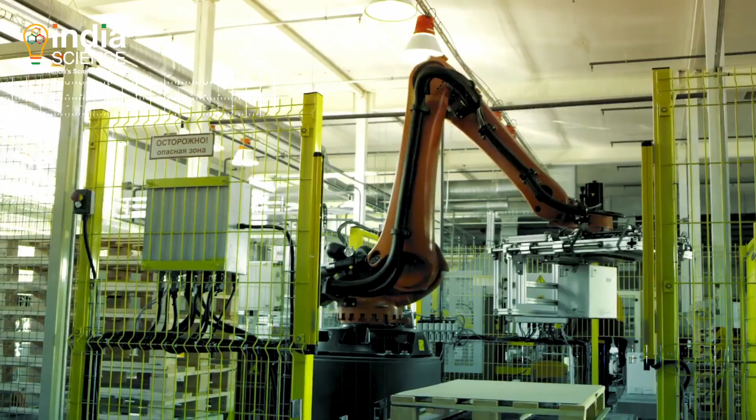With advances in technology, robotic automation is transforming the way we live and work, our efficiency and our safety levels. It is set to become the driving technology underpinning a whole new generation of autonomous devices that could provide the missing link between the digital and the physical world.

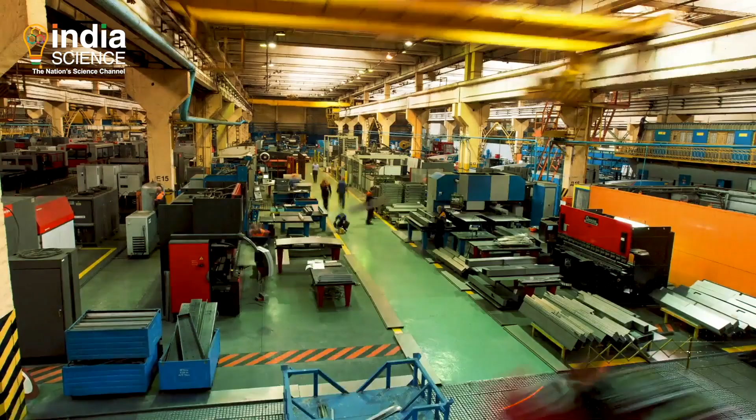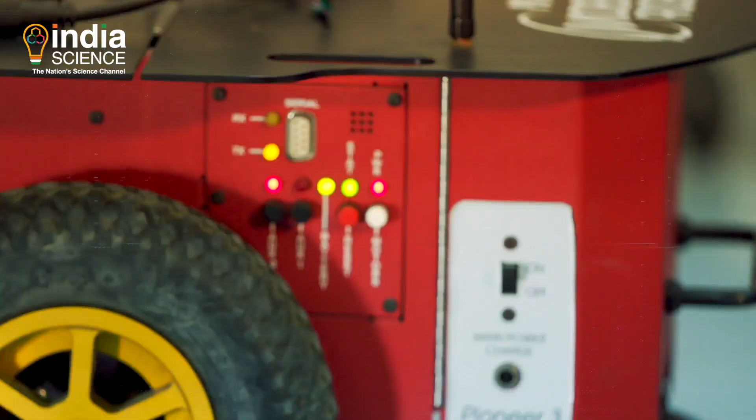How is India going to make this transition? How do we stay globally competitive and switch to smart manufacturing? What new science and innovation will power growth in this sector? Do we have the technology and know-how to be self-sufficient in this arena?

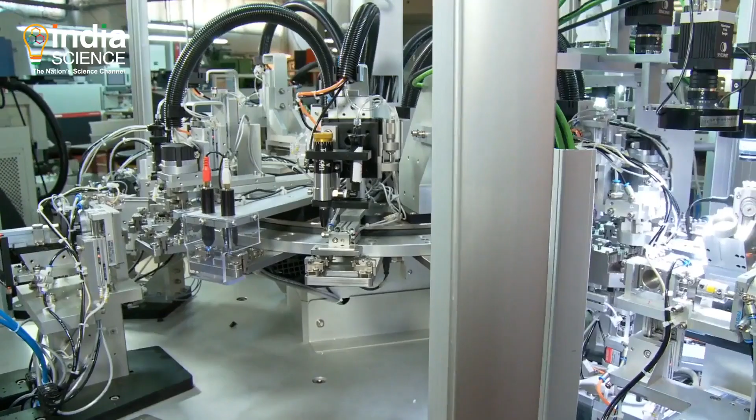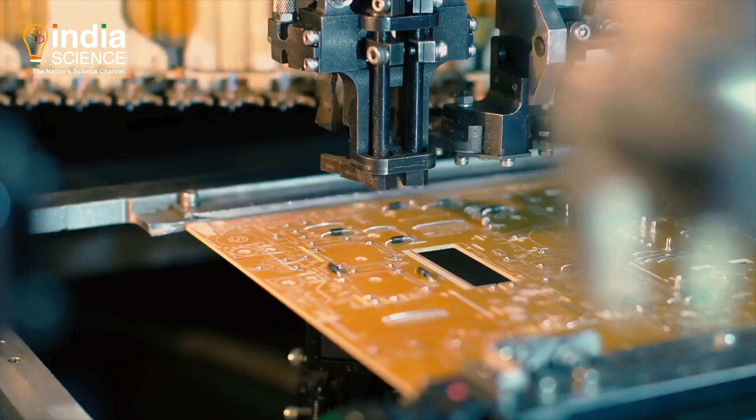Robotics is already a driver of competitiveness and flexibility in large-scale manufacturing industries. It improves worker prosperity by decreasing the time spent on exhausting, repetitive undertakings. Secondly, it improves the nature of work done as mechanical robotization infers a decrease in human error.

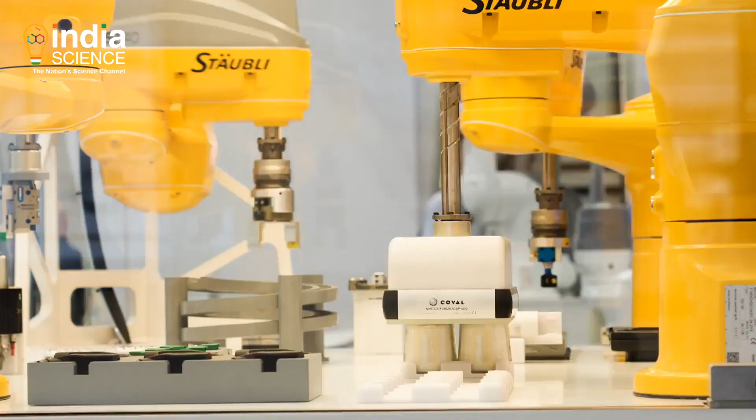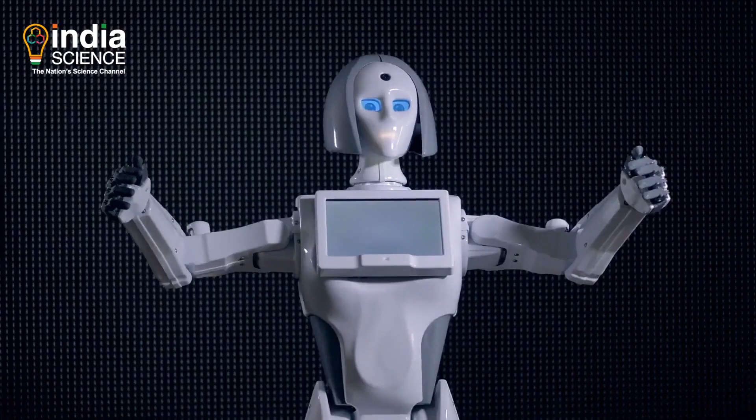The number of robots in use worldwide has multiplied threefold over the past two decades to 2.25 million, according to a June 2019 report by Oxford Economics. Trends suggest the global stock of robots will multiply even faster in the next 20 years, reaching as many as 20 million by 2030.

Robots are quickly moving out of controlled environments into homes and public spaces. In fact, researchers are also developing artificial intelligence systems that will allow robots to make decisions autonomously.

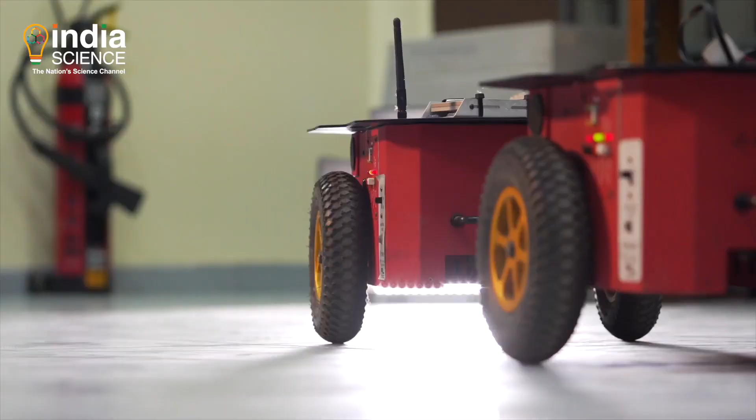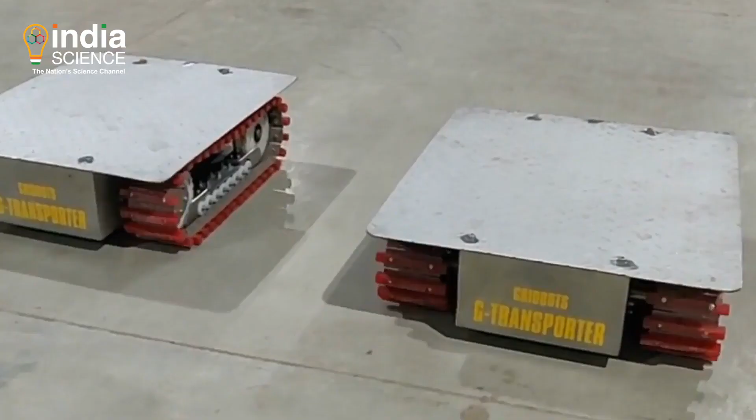Despite the fact that India has just 3 robots for each 10,000 workers, the homegrown robotics industry is developing at a remarkable rate. After the start of Make in India 2.0, many companies have come forward with their innovative ideas for robotics.

One such company is Gridbots. Gridbots is an Ahmedabad-based company that was established in 2007. The company works in the field of robotics, specifically artificial intelligence and machine vision.

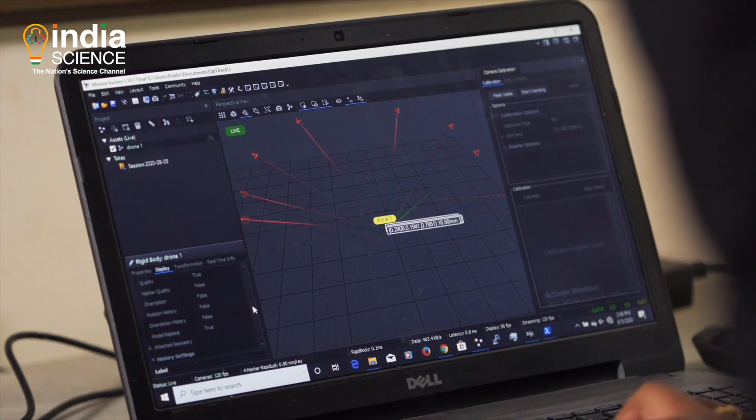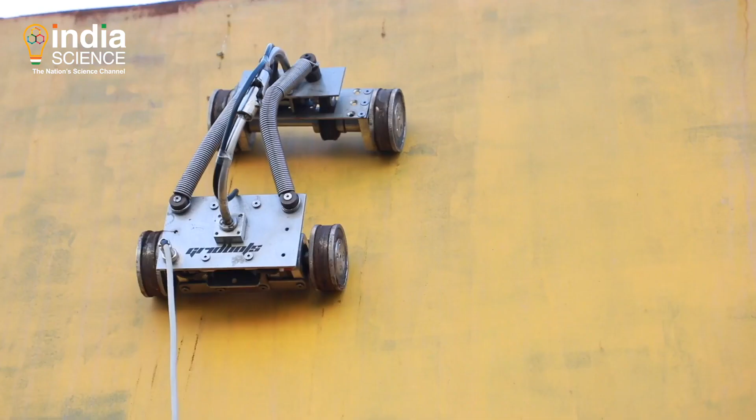The company develops robots that can be used in the industry for a variety of applications like dimension measurement, sorting and grading. Such robots are also used in outdoor work, such as surveillance in different kinds of terrain. They are capable of planning and navigating autonomously because of an inbuilt engine called the Grid Eye.

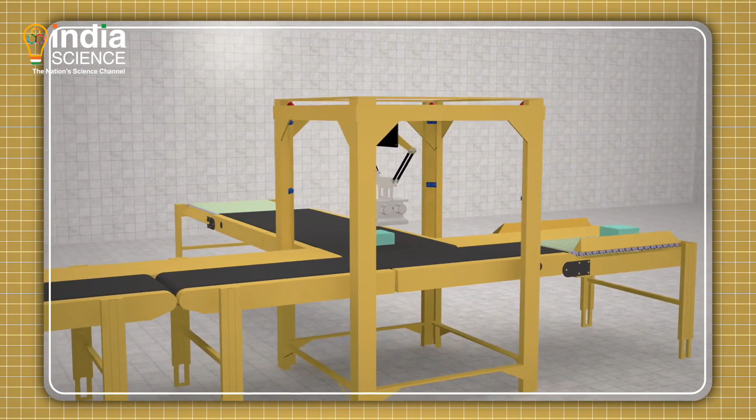Let's see what a Grid Eye engine is. The robot is able to process inputs from a range of sensors and cameras and can then plan out effective responses and actions, which include managing safety standards.

Grid Eye engine is the outcome of 15 years of research in the field of robotics, machine vision, and artificial intelligence. We have been using multiple sensor feeds like 2D cameras, 3D cameras, LIDARs, monocular cameras, stereo cameras, and trying to build an algorithm which can help a machine perceive its environment the way a human being does.

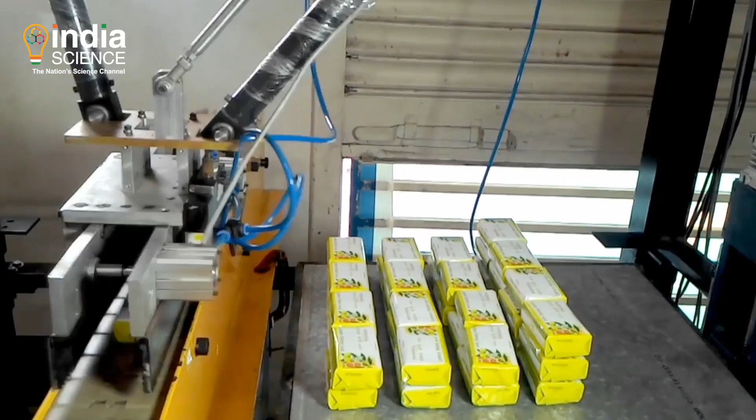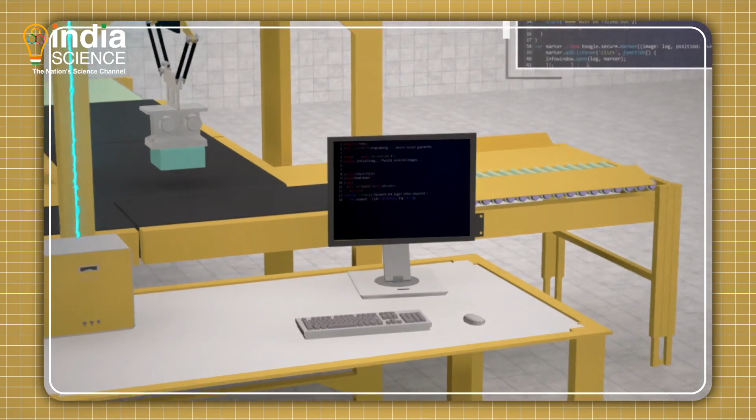How exactly does this work? There is an algorithm that helps the robotic device assess the environment and collate data from it. The data is then sent to the processing engine, which filters out the required data and processes it at a very high speed. Based on the data, the robot undertakes the task. The processor has a high level of accuracy that helps these robots to work efficiently and safely.

First of all, you have to identify multiple objects which are present in the video and then segment them, exactly how they are positioned in a 3D coordinate system, and then take actions. This has to be done in a fraction of a second, which becomes very challenging for today's hardware without a very good algorithm or software running on its core.

With Grid Eye, we have been able to solve this problem. Today, most of our robots are being powered with the Grid Eye engine, which helps our robot to work in the industry the way a human being or a human laborer works.

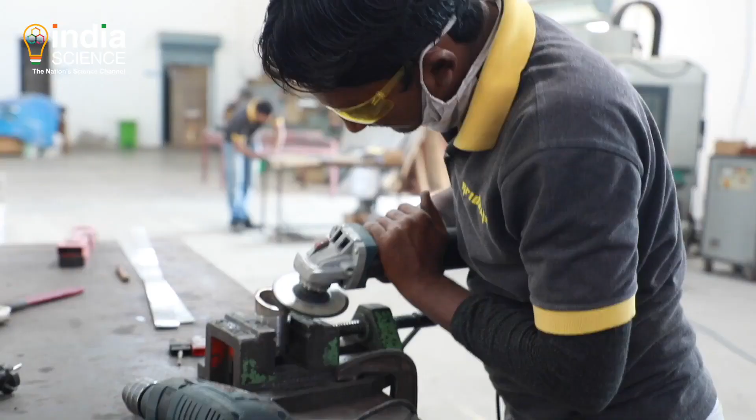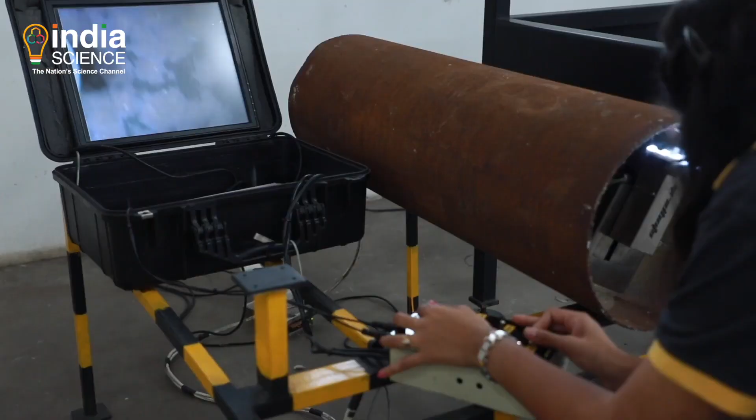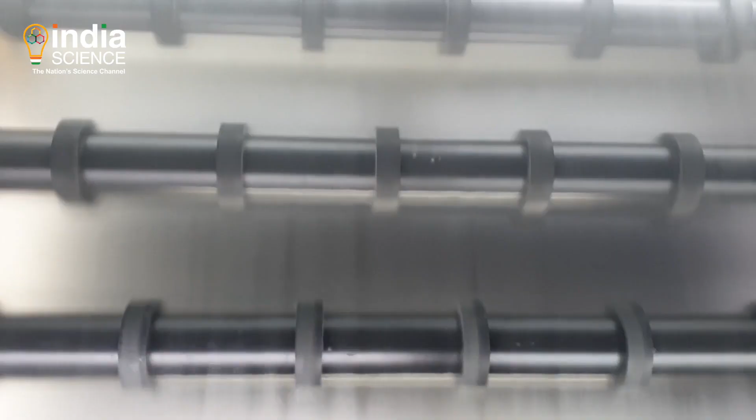The team at Gridbots creates robots, designing them to suit a customer's specific requirements. With indigenous research and manufacturing capabilities, Gridbots has deployed robots for almost all segments of industry and is targeting international markets. Some of the sectors where our robots are operational are glass, solar glass industry, manufacturing industry, food industry, pharma industry, electronics manufacturing industry, and warehousing.

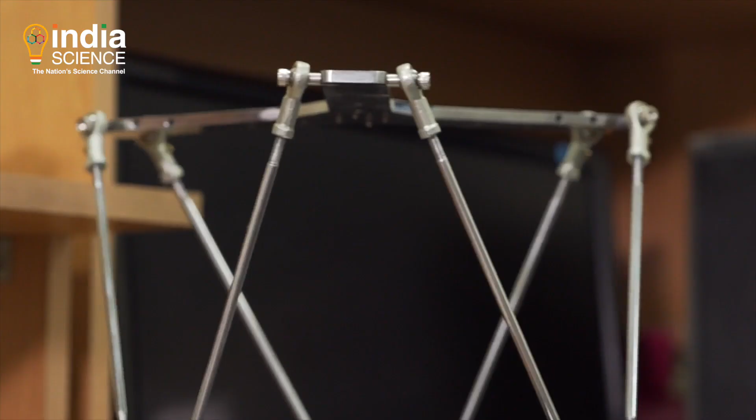What defines the company is their research and development. About 80% of their revenue goes to R&D. The robots made by Gridbots are economical, costing a fifth of those available in the market.

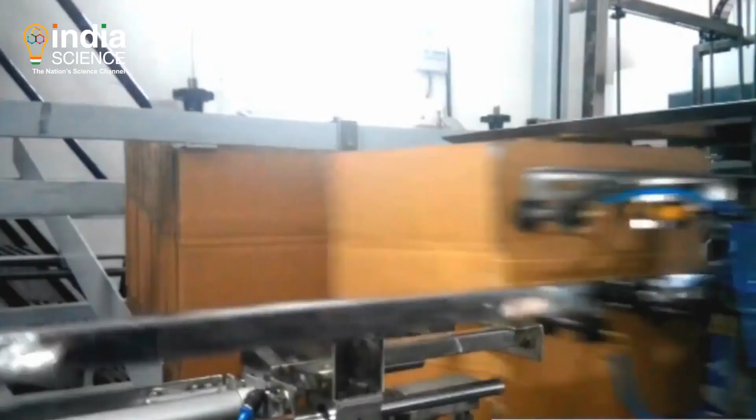You need to have an edge over your competitor. That edge can only come with dedicated in-house research, which has to be there with every industry. These industries should be investing a lot in research and ensuring that their products, services, or technologies are way ahead of their closest competitors. That is the only way to survive and grow with this vision of Atmanirbhar Bharat.

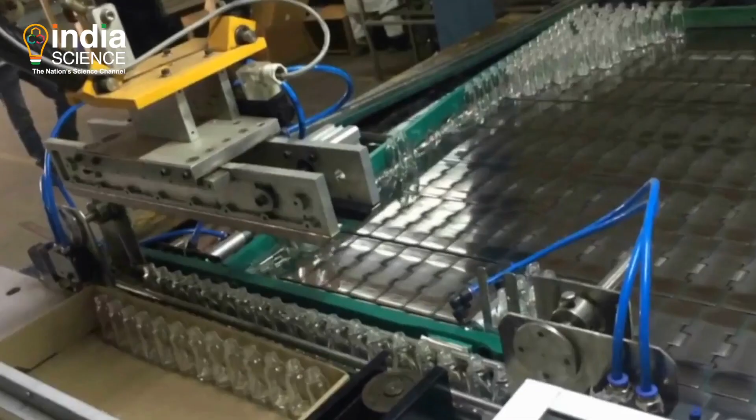Gridbots helps a lot of different industries by providing robotic solutions and machine vision that increases efficiency, working speed, and helps clients reach goals in a time-bound manner.

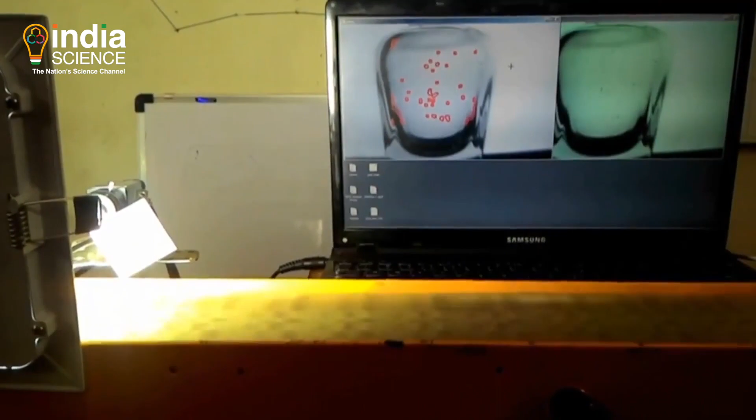The Gridbots engineers also visited our factory and warehouse, and they came up with a solution. They elaborated that they have a system capable of automatically transferring material, and that robotic arm is also capable of picking material from the ground and at some height.

Around 90% of their work is for the government. Their customers include the Ministry of Home Affairs, the Indian Navy, ONGC, ISRO, IIT Gandhinagar, etc.

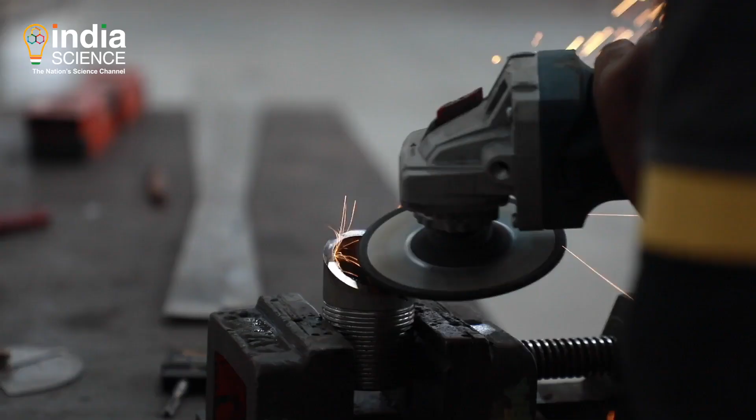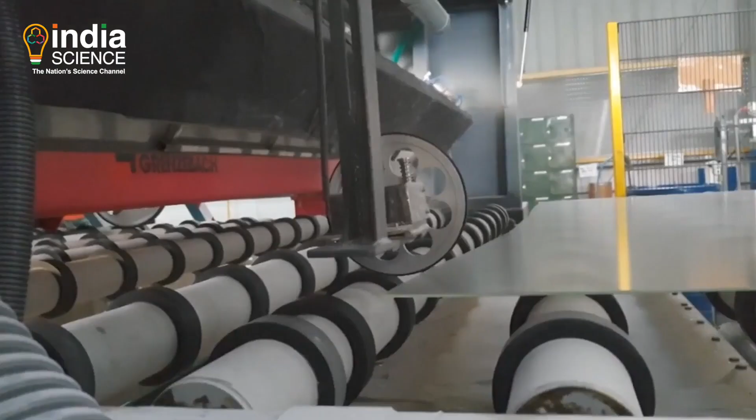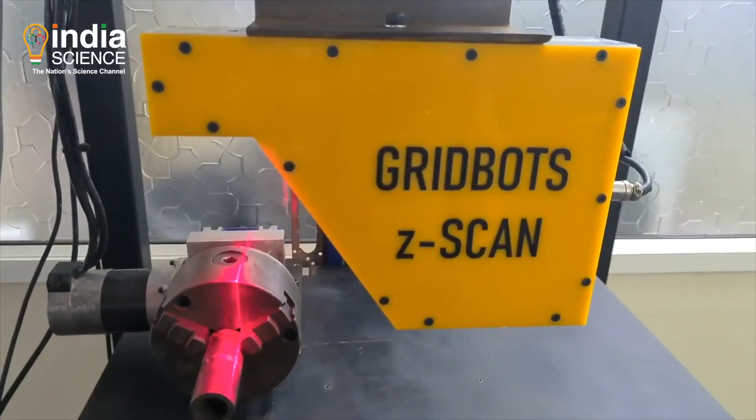Apart from making robots for different applications, Gridbots also works on machine vision systems, in which they make various products under different categories. A range of inspection systems including glass inspection, welding inspection, fabric inspection, and 360-degree tube inspection solutions are made. Geometric MegaView, MicroView, and Z-Scan solutions are developed under Dimension Measurement Solutions. A range of vision systems are developed to cater to different applications in various industries.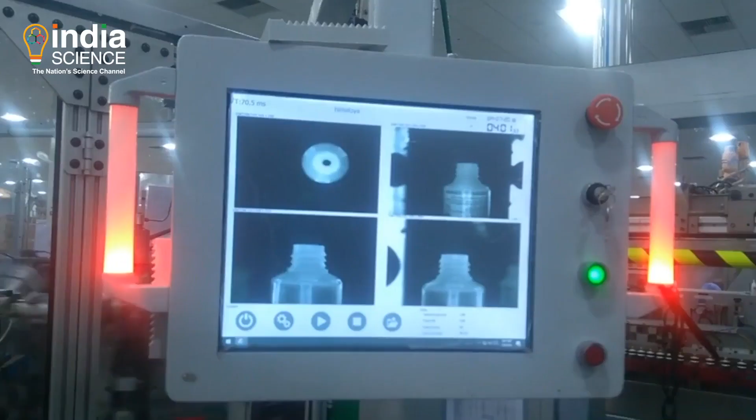Over the years, many such products have been developed that have been sold within the country and even outside the nation. When we say Atmanirbhar Bharat, we are talking about competing in global markets, where we know there are big players already established. What we are talking about is volume first, and quality of the product second.

When you're talking about quality of the products, it is necessary that we switch from the traditional way of working and adapt to something that takes care of quality and volume autonomously. Automation is the way to go.

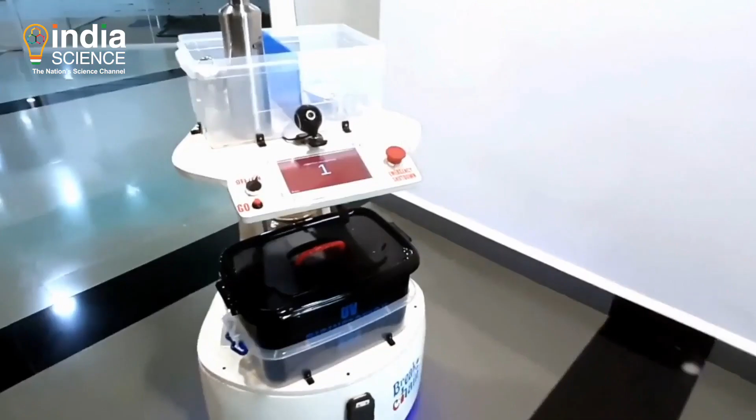India Science Channel was launched in 2019 by the Department of Science and Technology, Government of India. This internet-based dedicated science web channel is implemented and managed by Vigyan Prasar, committed towards science communication. The channel features science documentaries, discussions on current topics, interviews, and different programs covering the entire landscape of science and technology to make science popular among the masses.

India Science is a flagship project of Vigyan Prasar. Over a year and a half, we have produced more than 1,200 videos of different sizes, lengths, and genres, for different domains for the people of the country.

We've spoken, we've dived deep into the realms of different domains of science and technology, and we have gathered news, stories, films, and videos in almost every format imaginable.

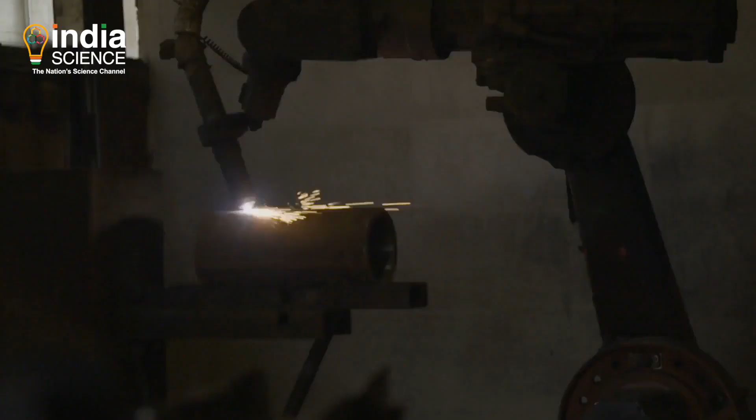We have seen how robots can be used in various industries. Today, there are also a host of service robots engineered to automate menial, time-consuming or repetitive tasks, releasing human workers to accomplish more intellectual functions. These can be used anywhere from hospitals to hospitality.

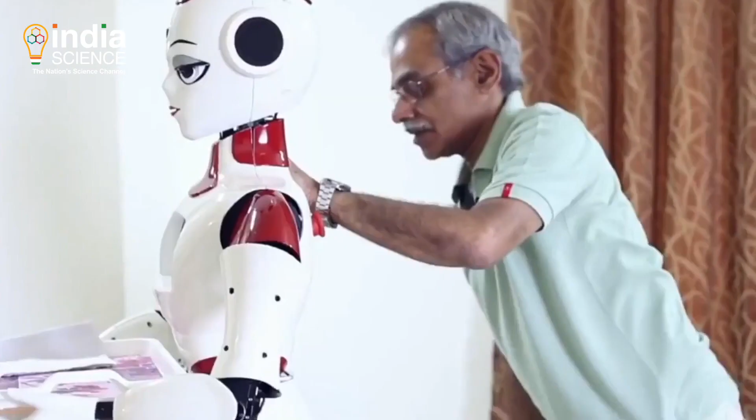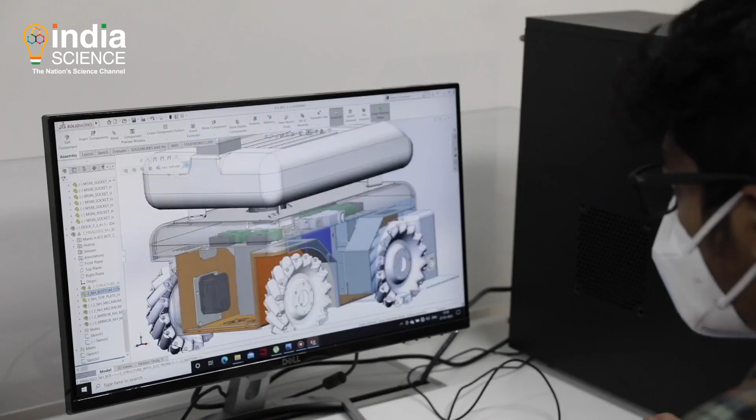Asimov Robotics, a Kochi-based company, has been manufacturing various robots since 2012. Their vision is to use technological and software innovation to make certain sectors safer and more efficient by increasing the quality of service. They have created robots that can assist humans by taking care of day-to-day jobs in sectors like healthcare, retail, hospitality and security. Most of the robots developed by the team at Asimov are created to work alongside humans - they can coexist and cooperate.

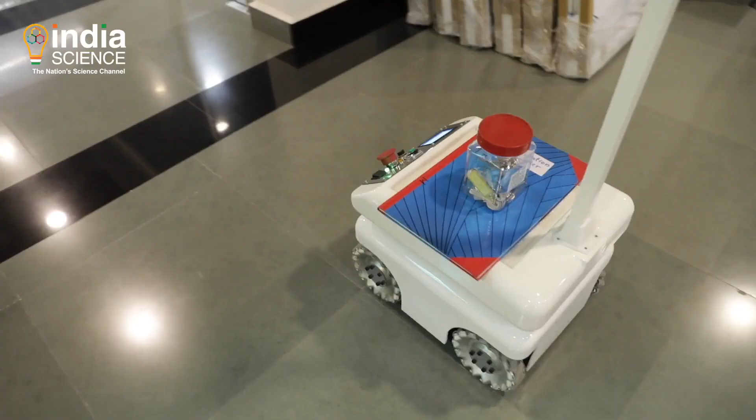They also have to coexist with each other in the case of cobots. The science behind this technology is primarily, if you look at the mechanics and hardware of the robot, kinematics and dynamics. The structure talks about how much freedom a robot requires to do a job. So we design a robot according to the task and the requirement of dexterity for that task.

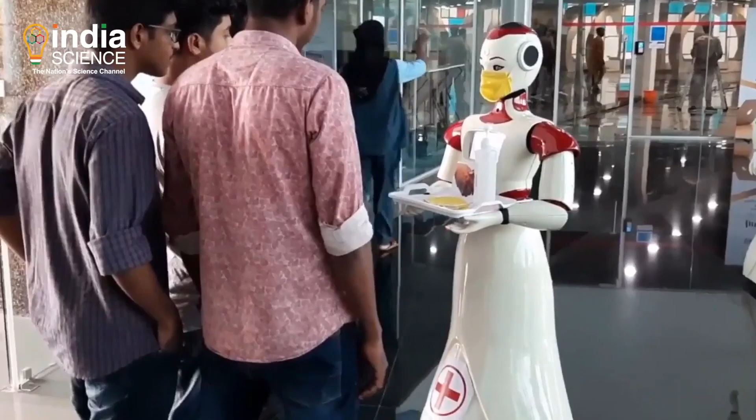See them operational in the front office, greeting customers, printing visiting passes for customers, and answering FAQs. ESAF Bank introduced this robot two years back, focusing on customer service for those coming to the lobbies who may have different questions and doubts, which they can answer through this robotic process.

That also helps my staff serve customers better. For certain customers, the robot helps direct them to which counter they should go to, so customers get the joy of better service through the robotic process.

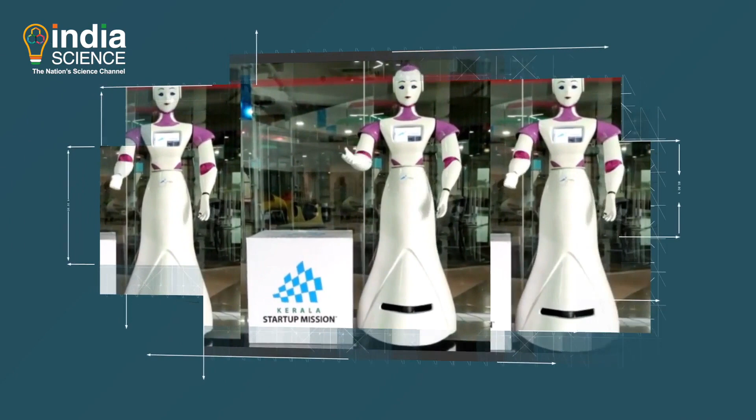These robots also have the capability of ensuring COVID-19 protocols, like taking body temperature, checking for face masks, dispensing hand sanitizer, and using sensors to ensure social distancing inside the bank premises.

The hardware of these robots is created using kinematics, which is the study of all the possible motions of a robot. Each robot has multiple sensors like radars, proximity sensors, 3D point cloud cameras, and GPS, all fused so that the robot is able to compute its trajectory.

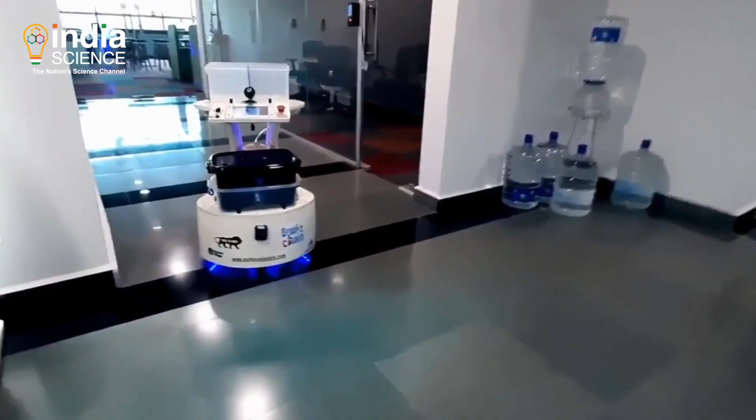For example, in the case of a logistics robot, autonomous navigation is used to control movement from point A to point B, understand the floor plan, and avoid dynamic obstacles in warehouses.

When it comes to manipulation, kinematics is used to compute where the robot has to go, ways of executing the task, and determining the end effector of the job at hand. A lot of math is used to plan these functions.

Most of the robots at Asimov use AI, or artificial intelligence, for functionality. Without AI, a robot is just a framework with some electronics.

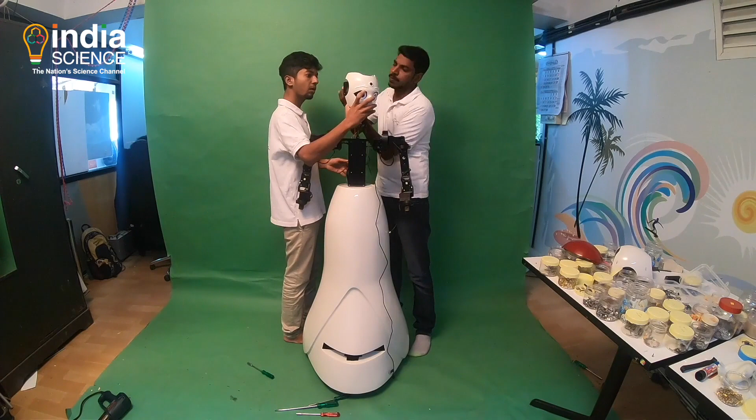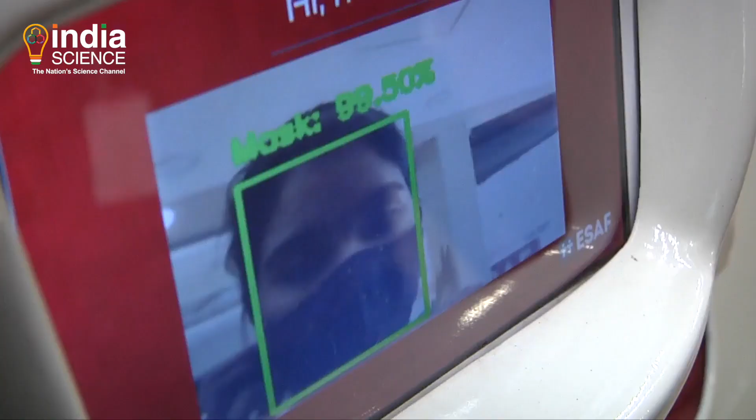For navigation, sensor fusion and AI are used to decide the best trajectory. Front office robots that interact with humans use natural language processing and face recognition, both of which are AI-powered functions. This helps them navigate numerous interactions. Each robot is also engineered to be self-planning, so it can optimize performance in the long run.

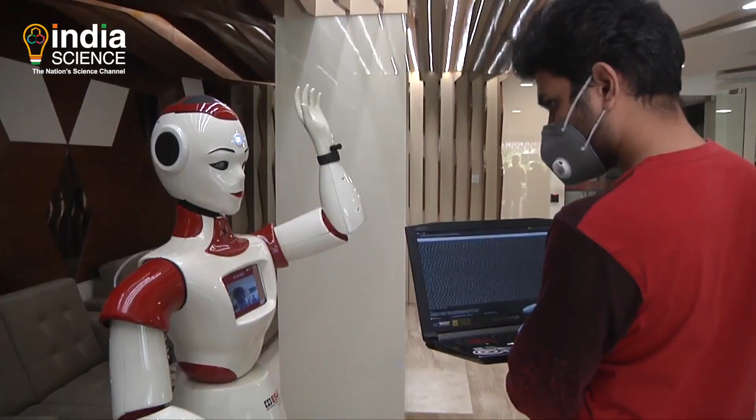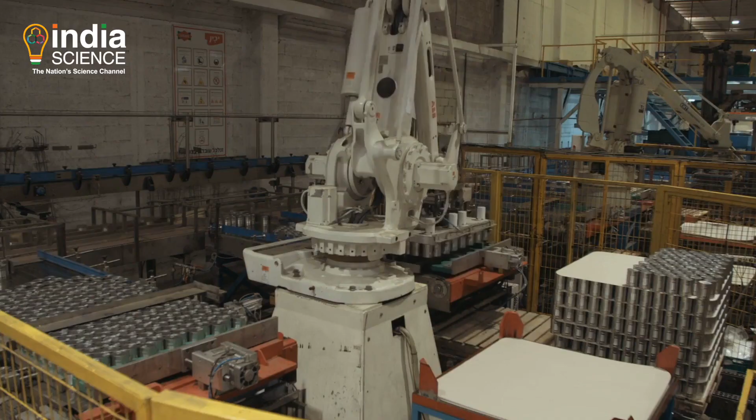While previously India was regarded as just a stronghold in math and software engineering, countries like China were at the helm of the manufacturing industry. However, with the introduction of robotic trends in India's manufacturing industries, many key functions are being filled through robotics and automation to increase productivity many-fold.

If you look at the manufacturing industry, you can see that every day the requirement is changing. If you look at the automotive manufacturing industry, you can see that there will be a facelift. Every day the model is different, and functionality will be added.

So to address that, we can only do it with the help of the Industry 4.0 revolution, which is a connected manufacturing environment where robotics is a key enabler.

It is not ordinary robots like there were earlier, which worked inside the work cell, but these robots are actually going to cooperate with human beings. Today's robots are capable of doing that.

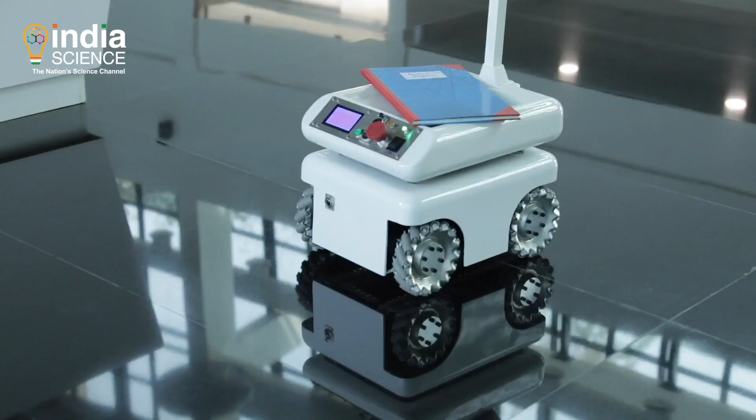So that is actually going to revolutionize the manufacturing industry and increase productivity and quality, and thereby definitely the economy will be benefited. Robotics can clearly play a big role in India's self-sufficiency journey.

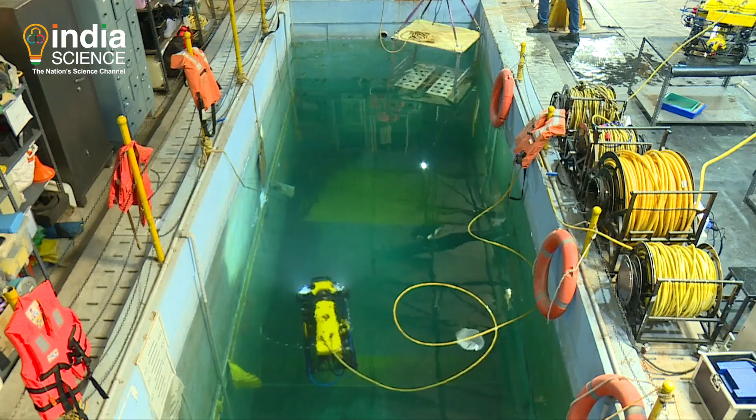After the break, a unique enterprise that designs robots that take us underwater. Why is this such a big area of work? How do we create robots that can man underwater functions? All this and more right after this break.

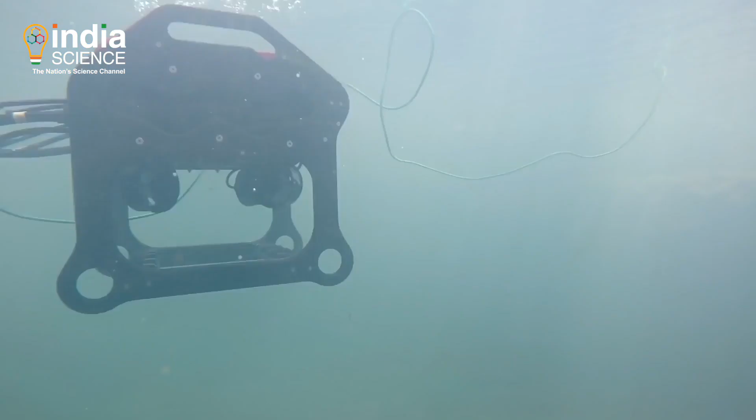An interesting space where robots are now being used a lot is in underwater applications. Underwater robots can play an important role in the offshore oil and gas industry, the defense sector, maritime research and rescue, oceanographic research, underwater archaeology, and environmental monitoring. Underwater robotics is making exploration cheaper and more accessible.

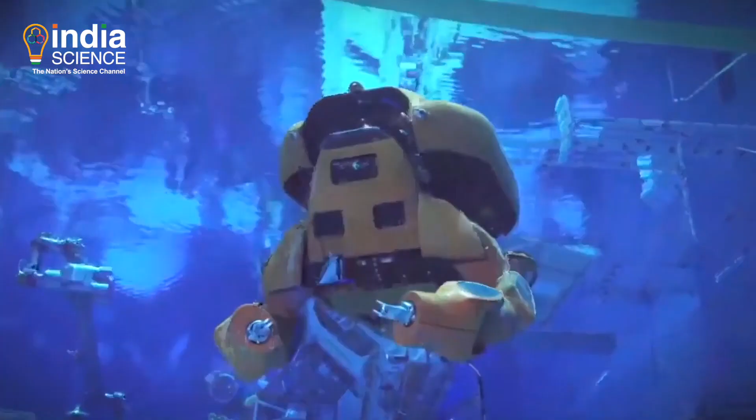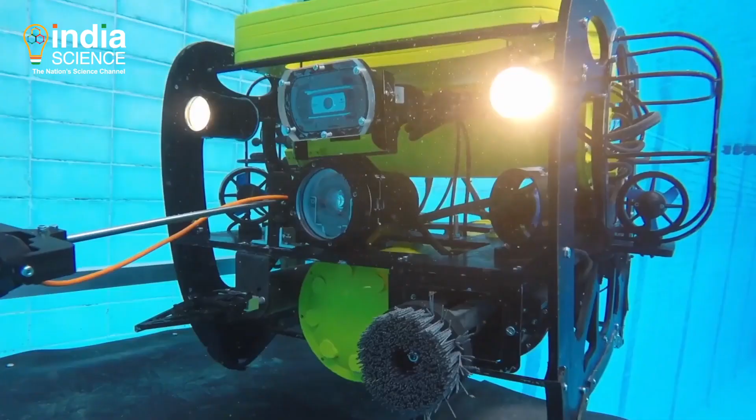However, this market has been largely untapped in India, with little or no technological developments to explore the potential. In recent years, there has been some work done in underwater technology, with several Indian startups coming forward with scientific innovations to push India's marine robotics.

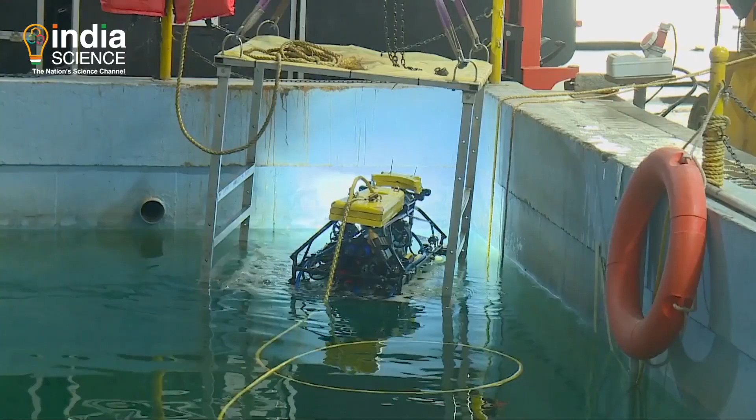One such company is Chennai-based Planys Technologies. This technology startup provides underwater robotic inspection and survey solutions using indigenously manufactured remotely operated vehicles, or ROVs.

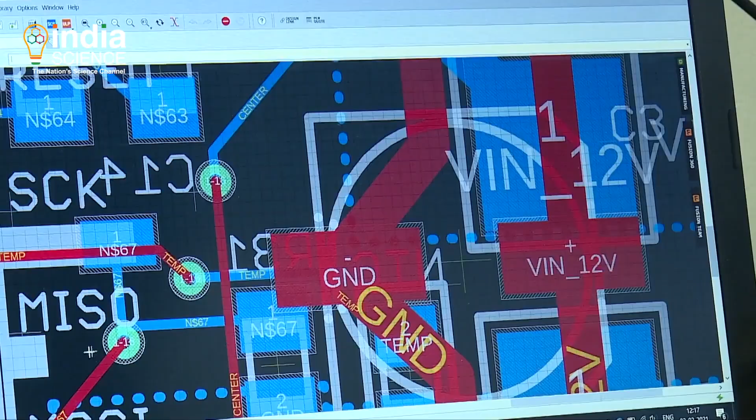Started by a group of innovators at IIT Madras in 2015, Planys is the first and currently the only original equipment manufacturer of ROVs in the Indian subcontinent. If you look at the Indian coastline, that's around 7,500 kilometers, which is a huge potential for a country like India to venture out in the open ocean and make use of the resources there.

In terms of economic exploitation as well as defense security, driven by these two motivations, we started Planys with a goal to build underwater tech that can be used for beginning with underwater inspection. It can be taken to defense and other economic sectors as well.

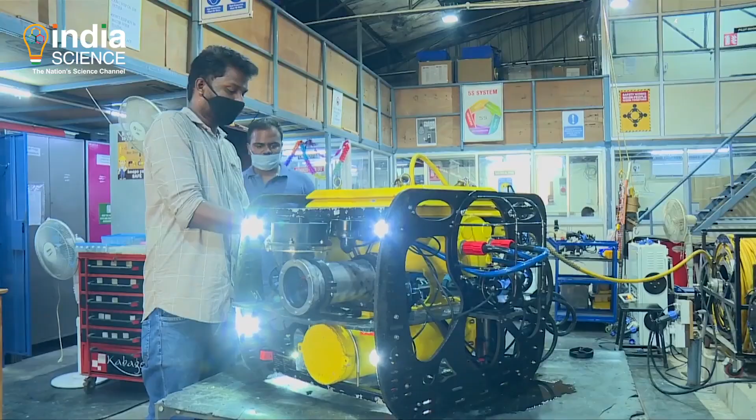Planys Technologies doesn't just make devices for underwater mapping, but provides start-to-finish solutions for any of these customers. These solutions are powered by 4 core elements.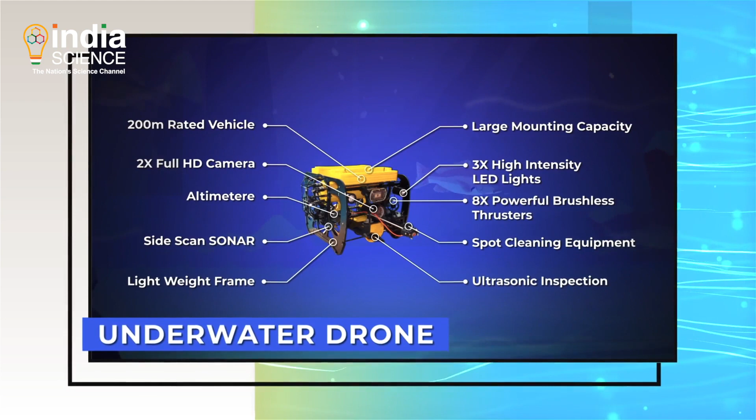An underwater drone. This is a small portable device that can be carried to any location. The goal has been to keep these platforms extremely portable so that there is ease of operation at any time. These drones have the capability to reach a depth of 100 to 200 meters, carrying different kinds of payloads and sensors with the ability to operate in different kinds of environments.

Data capturing techniques. The key value through all these operations is the data that is captured. The data is accessible on a digitized reporting platform. Data representation platform. This is where all the data is displayed and recorded for further processing. Planys has the first of its kind AI-enabled data representation platform.

And finally, a skilled operator team. A skilled operator team have been trained for several years to operate the remotely operated vehicle, ROV, in different kinds of environments like open waters, offshore, confined spaces. The operator team is trained to operate, get the right data, and present it in the right format to the client so that data-driven decision-making is much more feasible than it was earlier.

One of the fundamental challenges that Planys noticed in the market was misorganization of data, or in some cases no organization at all, which is a significant limiting factor for any asset owner in making data-driven decisions. Our data organization platform organizes the data, stores it for long-term uses, and also provides meaningful interpretation that helps decision making easier and allows comparison of various perspectives, thus ensuring that right decisions are taken at the right time.

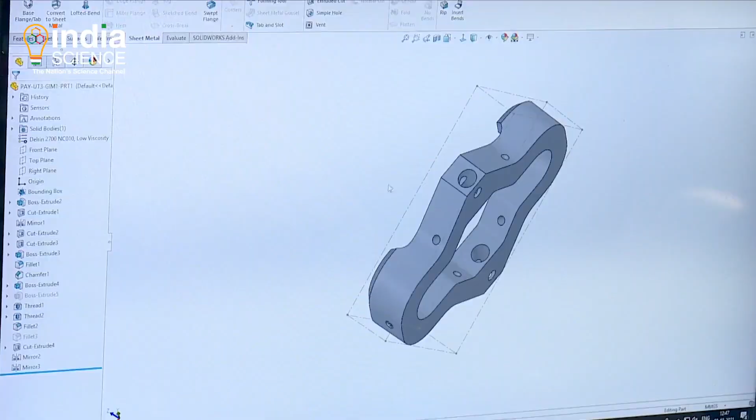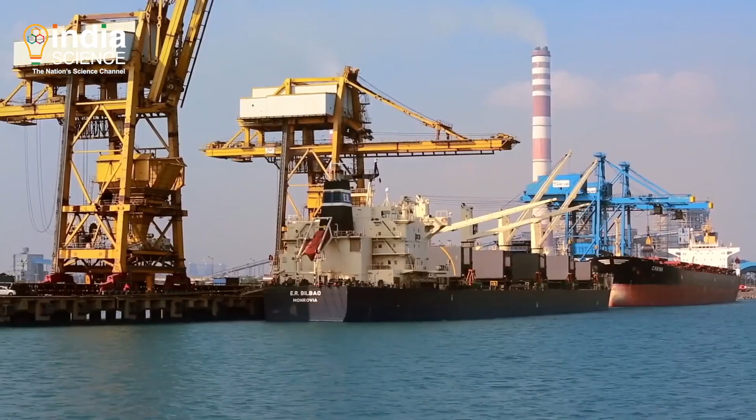So how exactly does the team put together these robotic solutions? They conduct a site visit where state-of-the-art methods are used to understand environmental conditions, structural conditions, and methodology to retrieve data for the client. This information is used to configure the ROV and its systems, the payloads and the sensors.

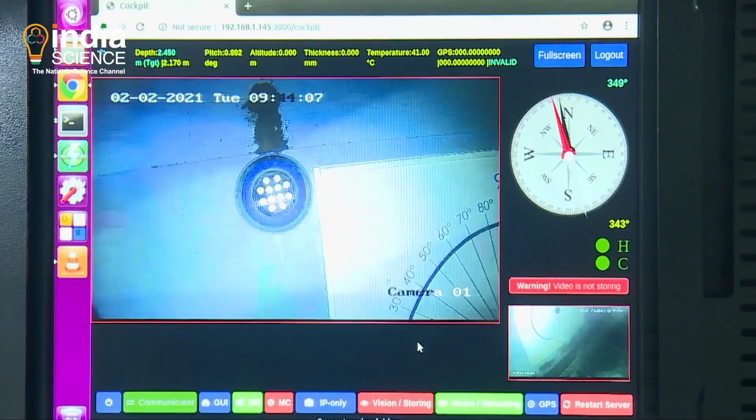The appropriate launch and recovery method is deployed and the ROV is steered to the right location where the inspection has to be carried out. Once the ROV reaches the location, the client is also invited to witness the inspection in live conditions. Then the data is recorded, and the same routine is repeated till all the required data is collected.

The team brings back the data to process, filter and streamline it. It is then uploaded on the digital reporting dashboard.

Planys is currently working in different sectors such as offshore, nearshore and onshore. Offshore projects include inspection of jacket platforms, offshore gas structures, single buoy moorings, SBMs. In the nearshore sector, Planys provides tech solutions for ports, harbour, jetties, terminals and the oil and gas and shipping industry.

In the civil sector or onshore sector, they inspect dams, irrigation channels, bridges and also work in the processing industry for the inspection of pipelines and storage tanks.

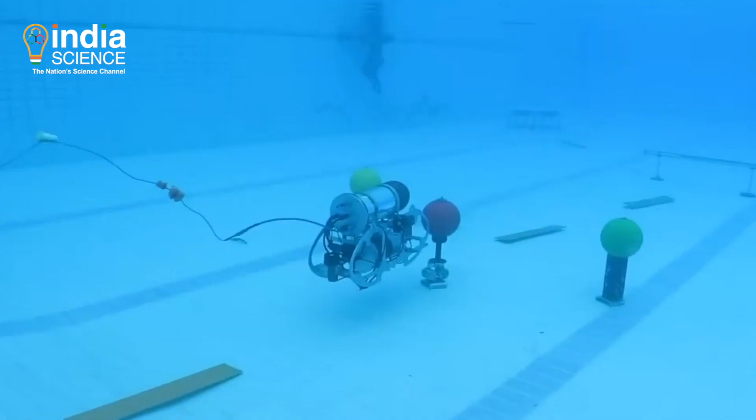Planys now has products with specific types of ROVs for different applications. These include a special series for pipeline inspection, tank inspections and open water inspections.

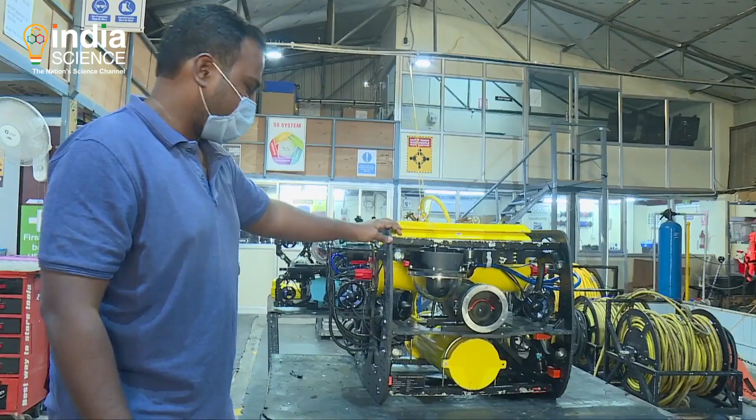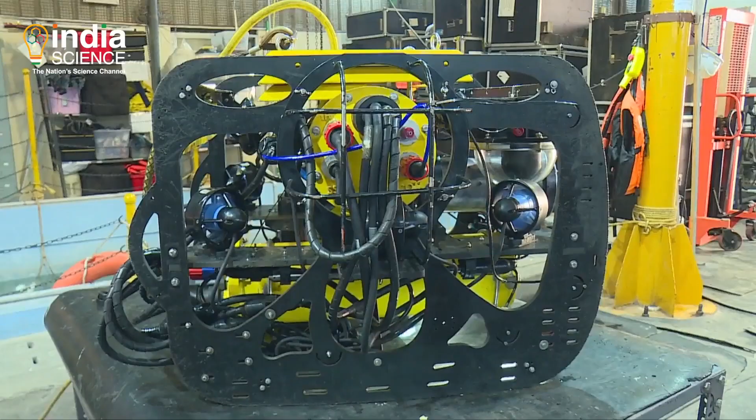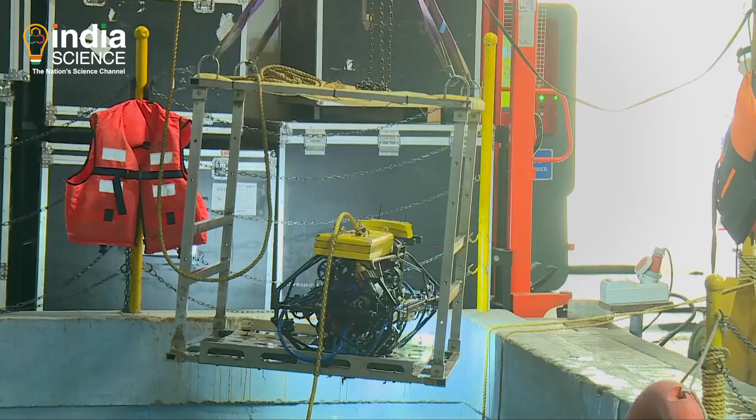Planys has a complete in-house team that engineers, manufactures, assembles, tests and runs the product. The raw materials, the components, the devices, majority of them are made by Planys or obtained from other local players, and very occasionally imported. The company's goal has been to not just develop products in India, but also to take them across the globe.

Planys has been able to push scientific innovation that has brought India on the map for marine robotics and underwater surveillance. Planys Technology is currently operating not just in India, but 4 different geographies including the Middle East, Singapore and Europe too. I think the Atmanirbhar vision is an excellent initiative.

We believe that it is driving a change in the way key decision makers in India think about usage and deployment of technology in day-to-day applications in different industries. And this is very much visible from the fact that the procurement norms for deployment and purchase of indigenous tech is now focusing more and more on companies or products that are developed and built in India, which is a very key motivating factor for startups and small companies like us.

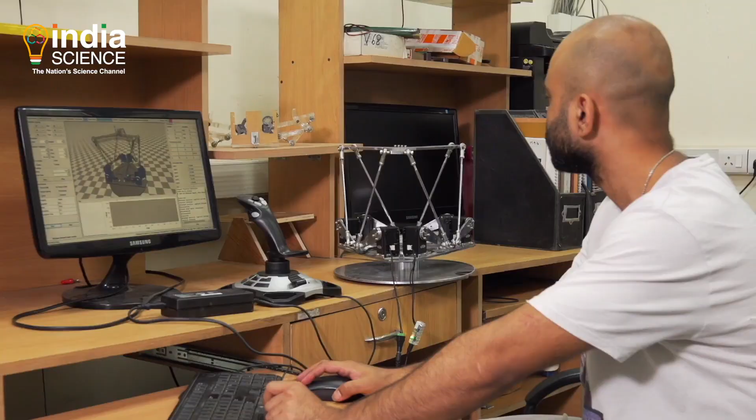Science and technology in new arenas like this can push India's development in the global arena. Institutions, both in the public and private spaces, that emphasize scientific innovations can push our economy and propel our journey to self-sufficiency.